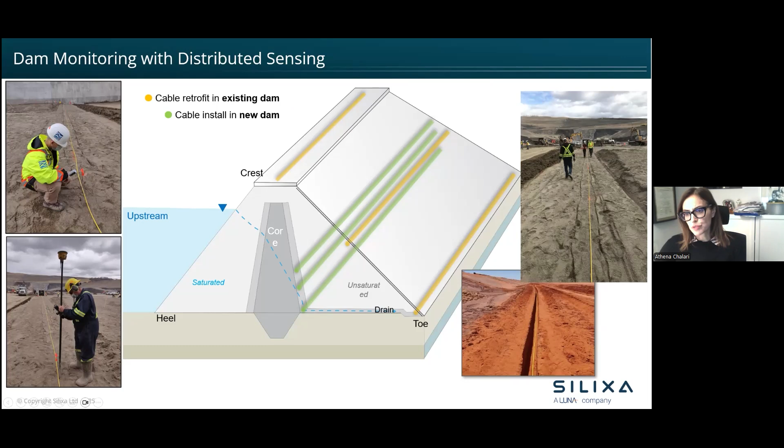The main cables that we will be using for dam applications are tactical ones. These are tight buffered cables that are very easy to deploy. They don't have any memory and can be trenched. So the very typical one will be this one with a double jacket to make it even more robust, and a rodent deterrent to avoid any chewing from animals. And if there is an existing dam, for example, and we want to put it into standpipes downstream, we can also use a steel armor cable.

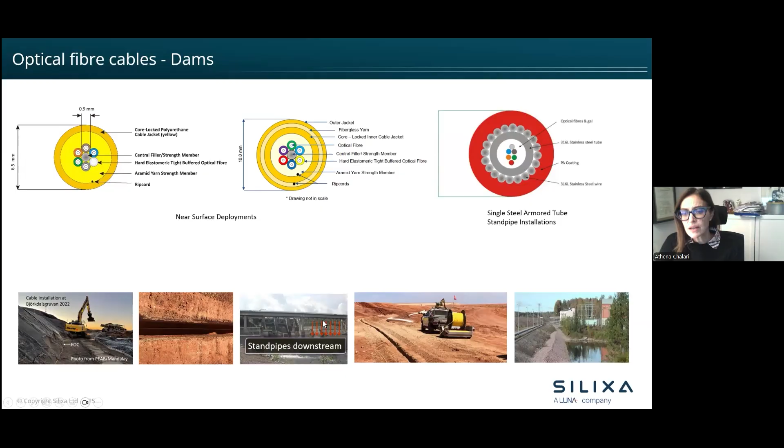The main concern in dams is internal erosion, and internal erosion occurs when the water that seeps through the dam carries soil particles away from the embankment or the tailings, leaving voids in the structure. So without any intervention, this erosion may finally lead to failure of the dam. Consequently, early detection of any internal erosion effects is of key importance to reduce risk and ensure the safety of the dams. And we can measure the dam with many parameters. We can do dam breach detection through continuous monitoring of strain, of seismic activity, of any movement, of deformation or subsidence. And all this can be detected at the early stages.

With the DTS, the distributed temperature sensor, we can detect seepage flow and calculate the seepage rates. With the iDSS, measuring the static strain, we can detect the earth movements along the dam and identify the strain loads on the cable. With the DAS, the distributed acoustic sensor, and advanced imaging techniques, we can identify nonconformities and regions of concern within the structure, saturated regions, identify voids and material changes. And by having an edge computing platform, we can integrate all these parameters and provide dense data sets that we can send to a cloud to the operator or process on site.

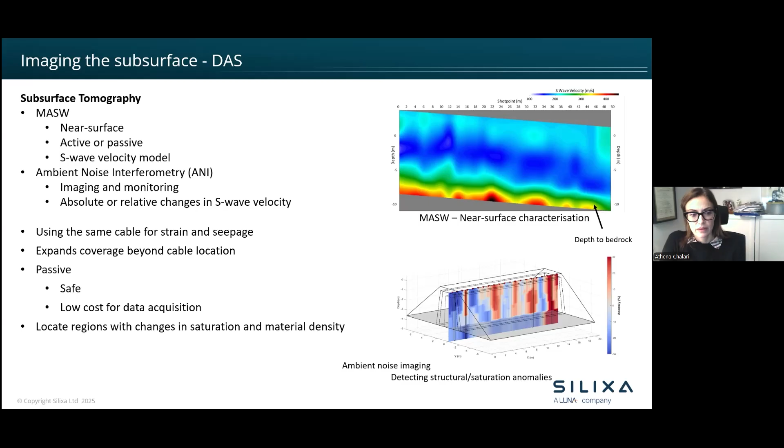Now, with the system architecture, the interrogator can be on site, with the fiber optic cable installed as you saw in the previous slide, the interrogator in a cabin or a control room on site where you have either only the interrogators with a network switch, sending the data via a cloud to the operator control system, to their SCADA, to run the application at their premises.

Or we can have on-site processing servers where we are doing the processing and the application is running on-site, and we are simply sending the processed data together with the raw data.

So how the DTS will work, this is based on our XSeepT application. We need a system calibration. The system calibration will happen with a reference measurement of several months to monitor the environmental temperature. Then the modeling will be based on the material properties of the dam and the seasonal temperature variation to set

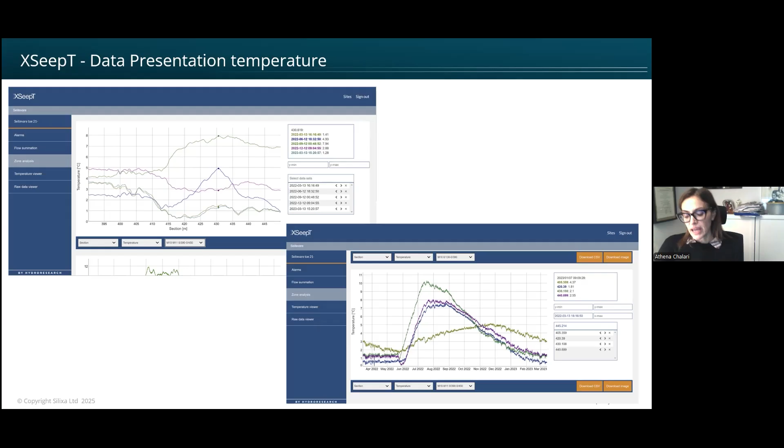different thresholds. And after setting the thresholds, we convert seepage into volumetric flow, liters per second, and identify how much fluid escapes from the dam. So we see a significant increase in speed and increase in flow rates that potentially highlight issues.

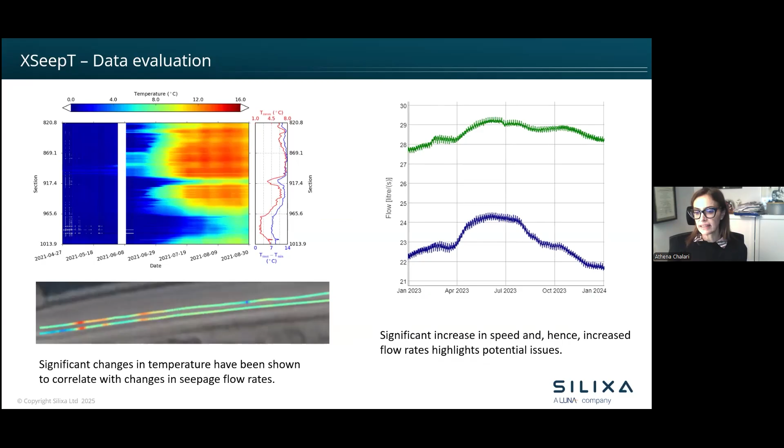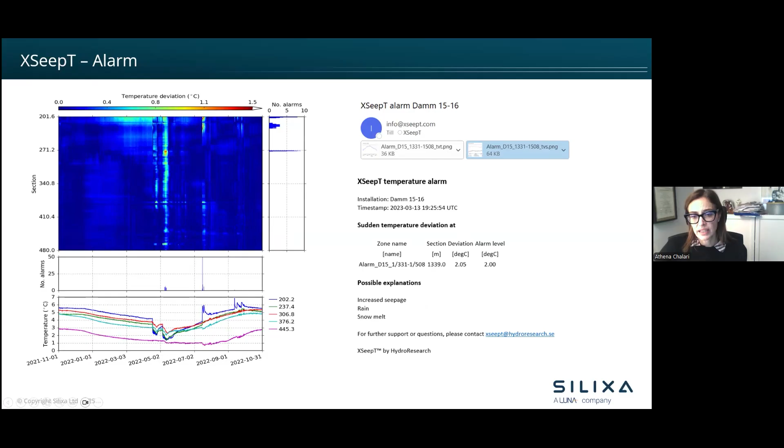But when we are monitoring the dam the whole year, and after modeling, we are able to distinguish the reason for the event. Obviously, it's not very easy to present a case study from tailings. These are most of the time confidential information, but here we are presenting a case study on an embankment dam, which is a similar deployment.

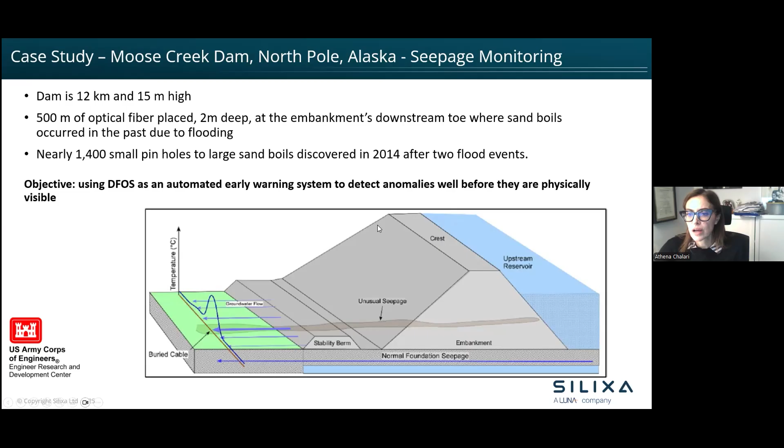This is Moose Creek Dam in Alaska, where we have deployed 500 meters of optical cable at 2-meter depth into a trench at an area where in the past they had reported pinholes to large sand boils after some flood events. And the objective was using the distributed fiber optic sensors as an automated and early warning system to detect anomalies well before they're physically visible.

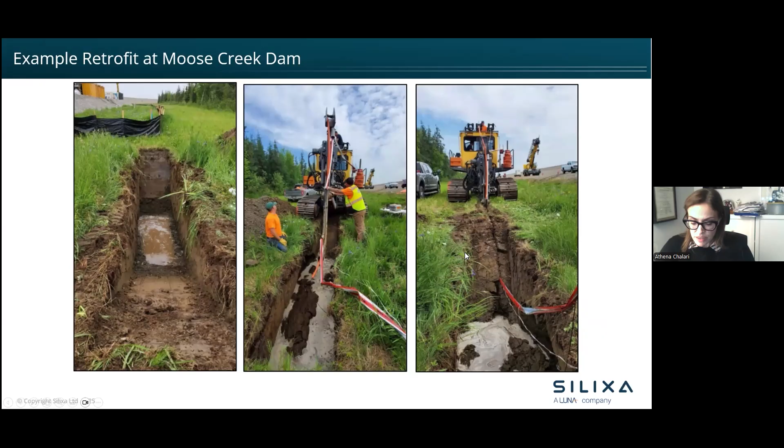And sorry, this was also in a study, and this is a published study that you can find online, in collaboration with the US Army Corps of Engineers and Silixa.

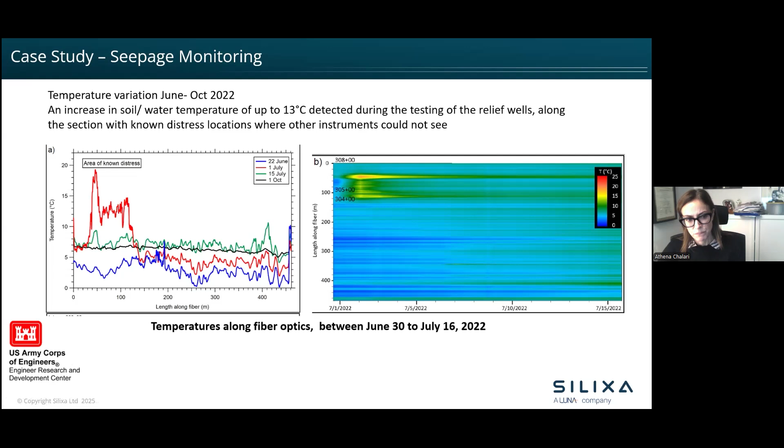Now, going to geothermal monitoring, Silixa has been involved in different types of geothermal systems, from ground source heat pumps, which are shallow geothermal systems, open loop or closed loop, to mine water energy, so how we can extract heat from abandoned coal mines that are filled with water, and shallow aquifers, to deeper hydrothermal systems that have temperatures up to 260 degrees, and enhanced geothermal systems like FORGE, again at quite high temperatures and in granite.

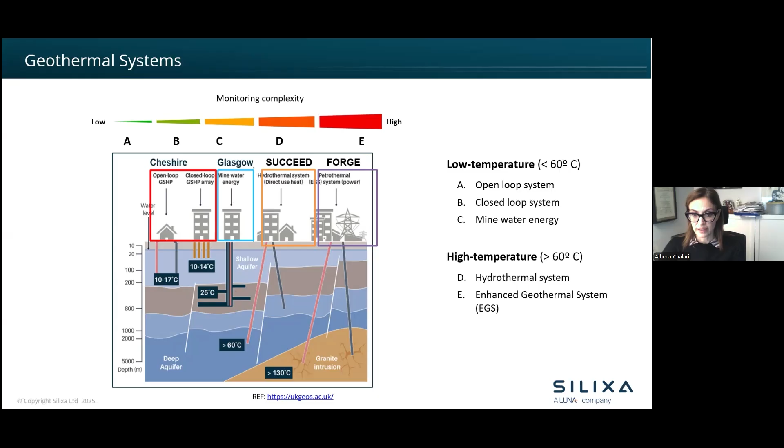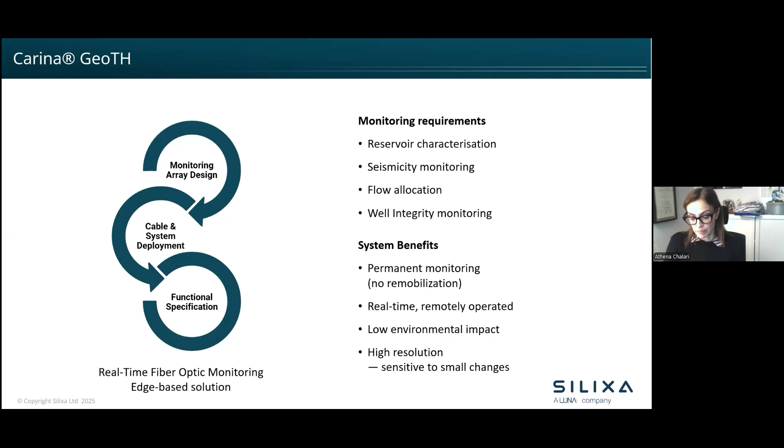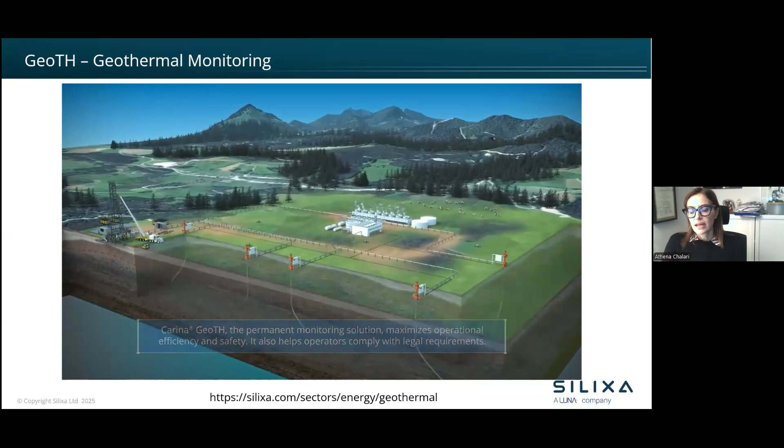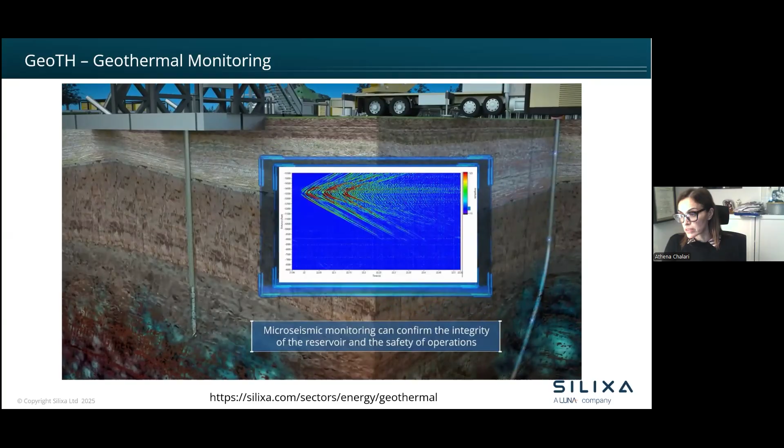We will ideally want a permanent installation for a geothermal system. The permanent installation will allow time-lapse, but will also allow microseismic event detection and localization, to monitor the induced seismicity. We can deploy fibers in production or injection wells, and we can also deploy fibers in monitoring wells. And these wells can be daisy-chained.

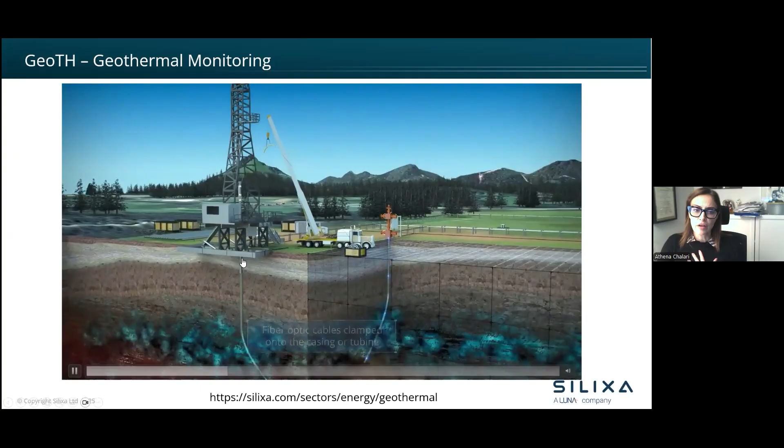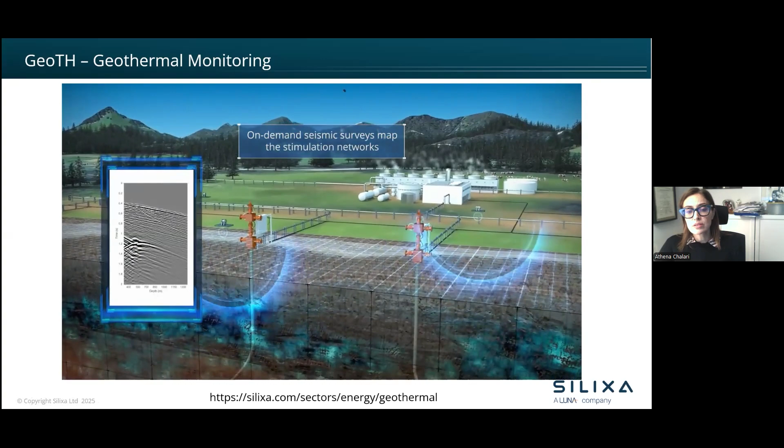So when we have a permanent deployment, you see here the casing, the cable will be clamped outside the casing, then we lower down the casing and we cement, and the cable will be well coupled with the formation and provide good quality data. We can have on-demand seismic surveys, so vertical seismic profiles and imaging of the subsurface.

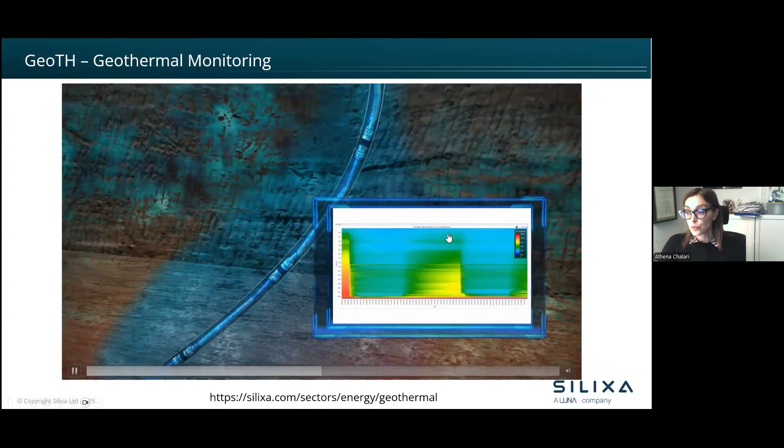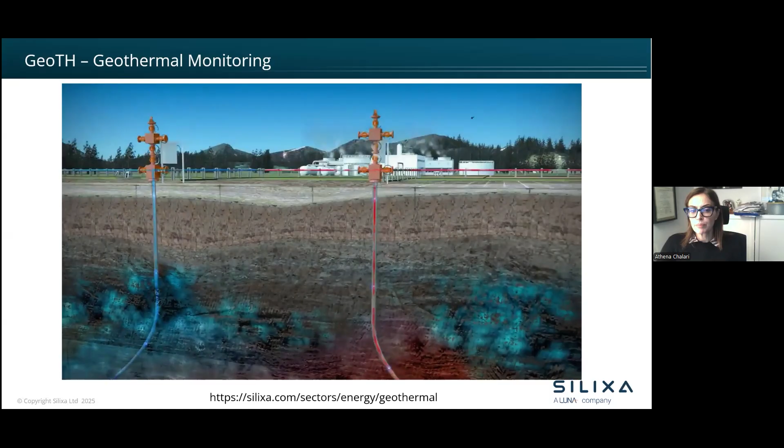We can measure with DAS and simultaneously with the DTS. So the DTS can also be used at early stages to monitor the cement curing process. We can see interconnectivity between the wells and measure flow allocation, temperature distribution monitoring to enable dynamic reservoir injectivity.

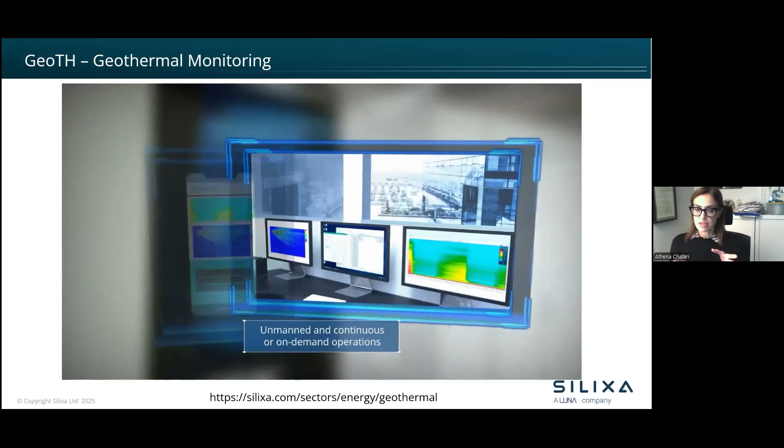And then we are bringing the signal from downhole with the surface cable to our control room. And inside the control room, we can have on-site the different interrogators to measure the 3 parameters: temperature, strain, and acoustic. We can have data storage on-site, but also enable remote access for quality control, or have data processing servers on site based on our platform to do all the applications there, and then send the data to the operators using a cloud system.

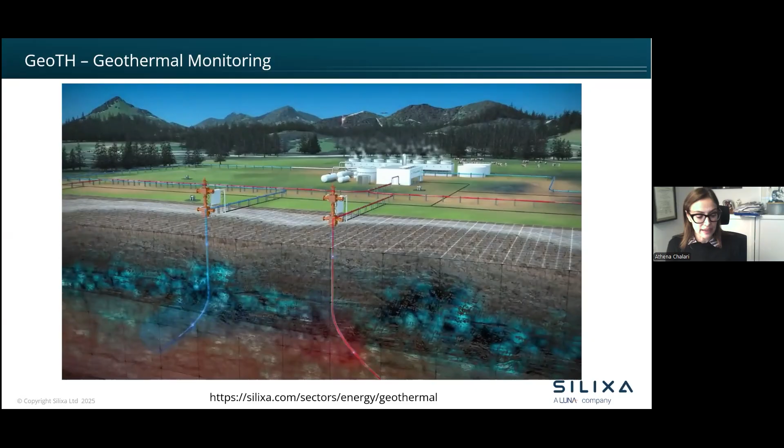The cables then can be deployed in many ways. Ideally, for a permanent installation, we would like behind the casing cemented, well coupled with the formation to enable also time-lapse surveys. But we can go on tubing, production or injection tubing. This is a semi-permanent installation for brownfield development, or wireline slickline installation like we do in oil and gas for an intervention where you will require surface service.

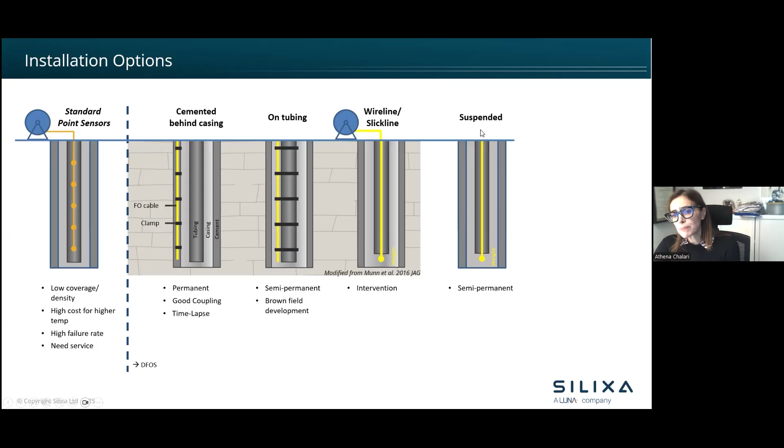Or if we have existing wells, and these are all typically observation wells, the only way to monitor the geothermal plant, the geothermal field, is to have a suspended system, and this is a semi-permanent installation.

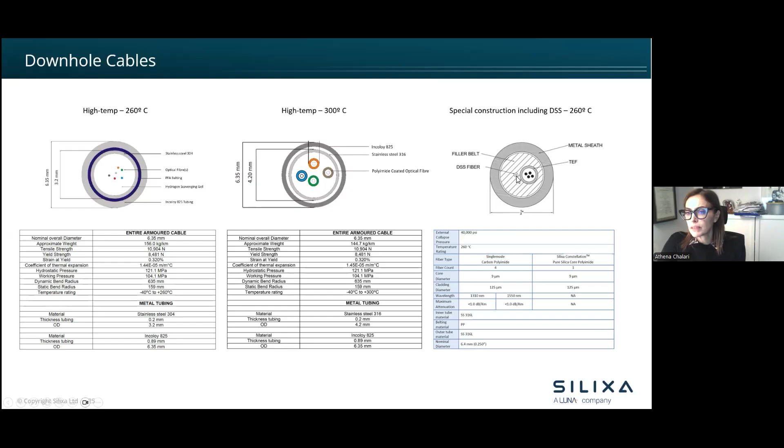For the downhole, typically behind the casing, on deep geothermal that reaches high temperatures, we can use double steel tube cables up to 260 degrees Celsius. This cable has an internal tube, the fibers are in a loose tube, then you have a belt to avoid any slip between the outer tube and the inner tube. You can go to 300 degrees with polyimide coated optical fibers, or you can go to cable designs where you will have the DAS and DTS measurements in a loose tube and a tight buffer fiber for the static strain outside.

The architecture of the system is having one line of cable going down into the well, and inside the cable you will have 4 to 6 fibers. The multi-mode fibers will loop together, the single mode will be looped together, and create loops inside the same cable. These splices at the bottom of the cable will be protected with a downhole assembly. So the optical signal will go down and up, and then in a junction box, it will be spliced with a surface cable, trench, and meet the next well.

So that way we can have clusters of wells connected together and measure simultaneously with a single optical path, and we can bring with a surface cable the optical signal back to the control room where we have all the interrogators and the servers, and we can do our data storage, processing, and acquisition.

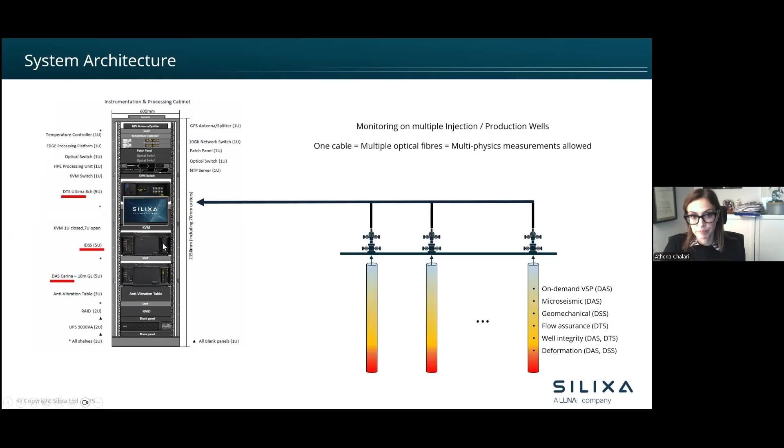If we have the edge platform system, we can have an edge scheduler that will tell the systems how much time they will interrogate each cluster of wells or each well, and with what configuration parameters, and then jump to the next cluster and repeat the cycle. We can have single distributed plots or multi-physics plots, and integrate that with point sensors into the wells. So the system is a completely scalable architecture. It's a modular system that can be quite simple or have all the applications there.

And the main applications are these. You can have vertical seismic profiles, so you can have your frequency spectrum, see the raw data, see the stack data, see how the signal to noise ratio improves with the stack data, make any corrections and do the quality control, convert to SEG-Y files, have thermal profiling plots with the DTS, temperature to distance, temperature to time, and multi-mode plots with DAS and DTS together, continuous acoustic data, and casing integrity by combining also data from data loggers.

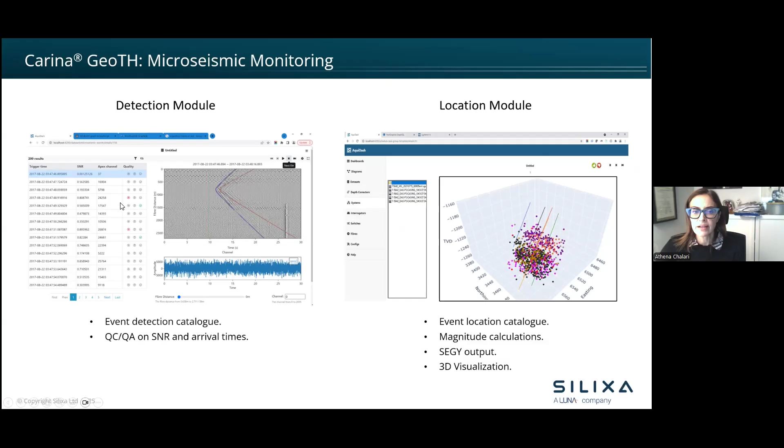Another module is the module for induced seismicity, microseismic event detection. And if we have cables installed in more than one well, we can also localize the event based on event location catalog, magnitude calculation, SEG-Y output, and a 3D visualization of the microseismic event cloud. From the apex of the event, P and S waves, you can see how far the event is from the fiber optic cable.

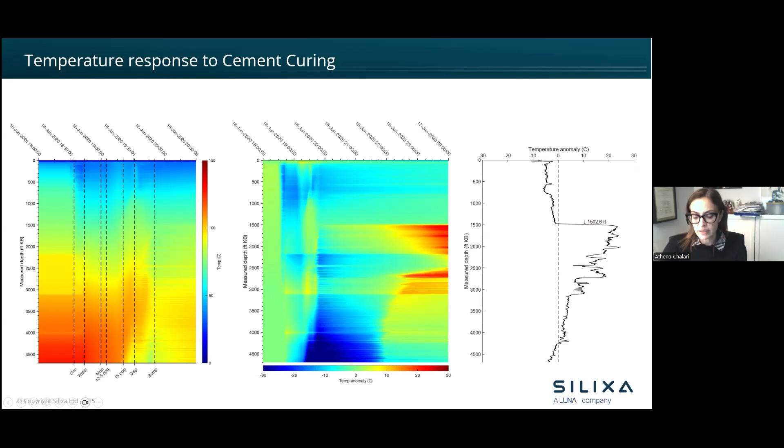As I said, during the cementation process, we can monitor the cement curing with the DTS. The cementation is an exothermal reaction, so you see here how the temperature jumps when the cement starts curing, and the thermal blocks. And we can combine if we have a well that is stimulated in different zones.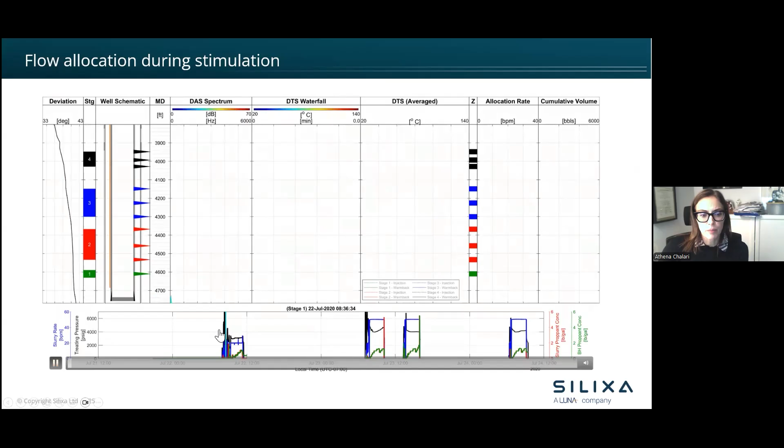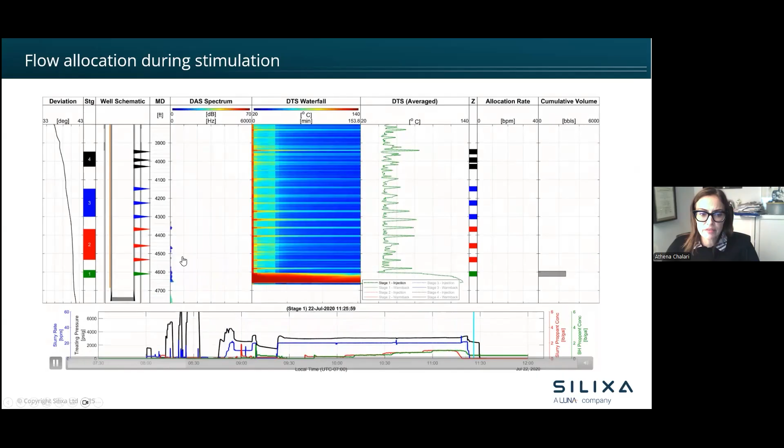So what we are doing now, we are combining information from pressure. We see in the deeper zone how the fractures are opening during stimulation. And when we jump to the zone above, we'll see that this is not active anymore, and fractures above start activating. And that way we can also do fracture rock characterization and see if any fractures are connected, go to zone 3, and so on.

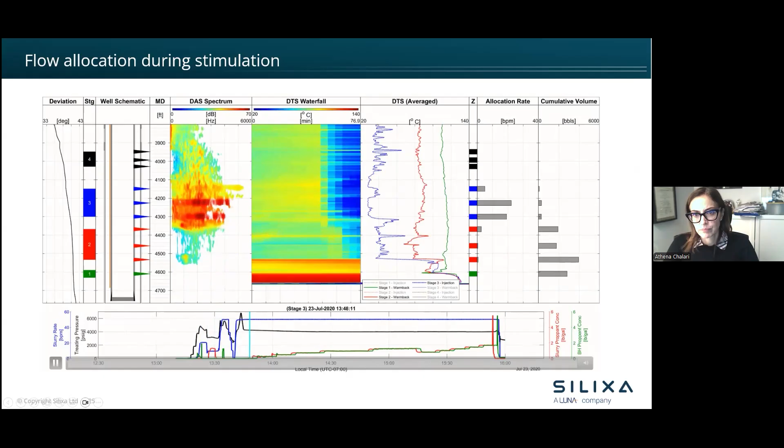Going into some geothermal case studies. I don't know how good I am with time.

This is the Utah FORGE site. FORGE is Frontier Observatory for Research in Geothermal Energy. So practically we are testing different technologies to find the optimum cost-effective technique for geothermal monitoring on an enhanced geothermal system. This is sponsored by the US Department of Energy and comprises 3 wells. This is a seismic monitoring well that was the first one that was drilled, and then the production well and the injection well.

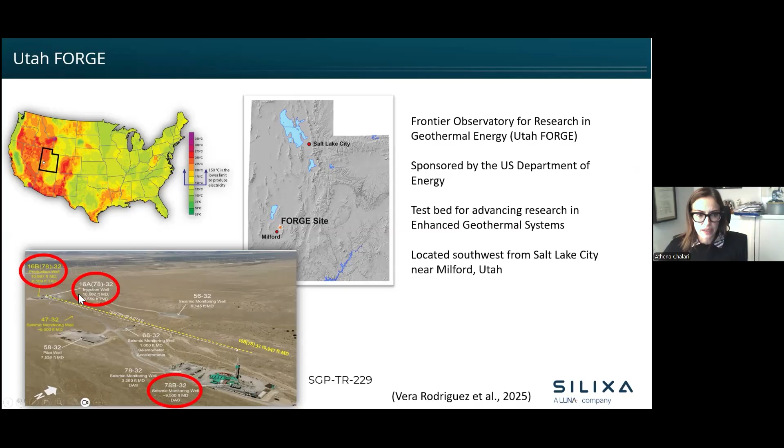So we have fibers in the observation well and in the production well. In the observation well, we have single mode fibers. In the production well, I think there was an issue with the single mode fiber, so we are operating the DAS system on a multi-mode fiber. And you see here also the injection well parallel to the production.

And in the control room, we have an Ultima DTS unit. We have our iDSS system to measure any deformations. We have our iDAS system for the acoustics, our edge control. The iDAS is sitting on an anti-vibration table to absorb any vibrations and provide better results. And we have also a data storage RAID. Here for these downhole techniques, we will be mainly using 10-meter gauge length. That is also comparable to a geophone array.

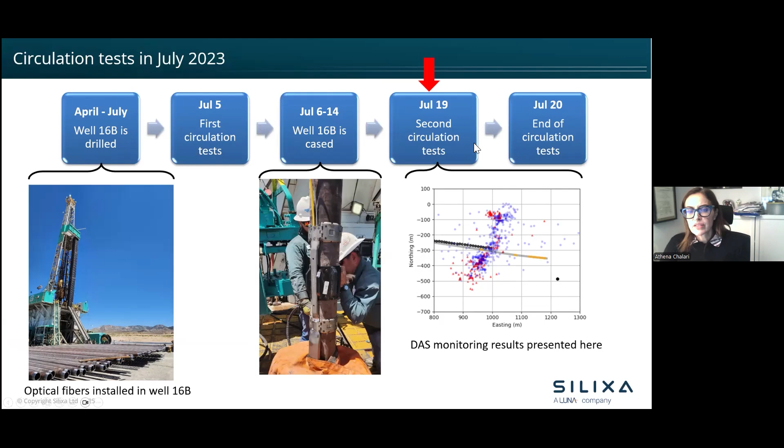They started with a circulation test. They drilled the production well in April 2023, and then they did the first circulation test. Here you see the casing, the cross-coupling clamp, and the cable clamped here onto the casing. This is a cable, and a centralizer to protect the cable as the casing is going downhole. Then we have the second circulation test and some results.

We were able to identify 257 microseismic events. And the 3D modeling that was generated from the DAS data was in good agreement with the surface station locations that you see here in blue. The DAS is in red, from Niemz et al. in 2024.

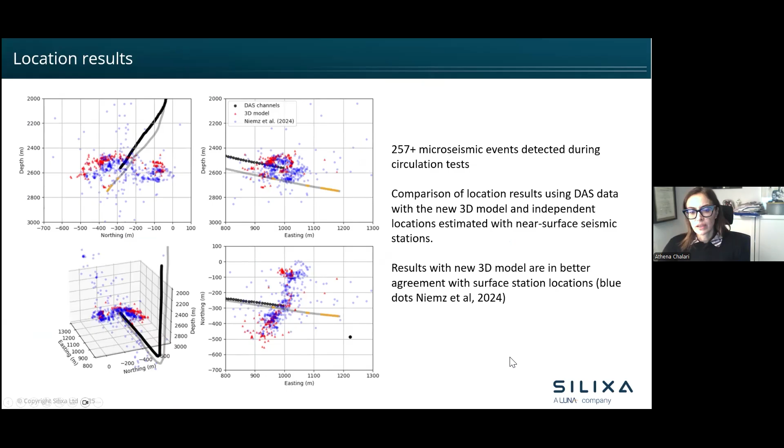Another installation is shallower geothermal. This is at the UK Geoenergy Observatory in Glasgow, in Scotland. BGS, the British Geological Survey, is the operator of this site and the owner. And there are abandoned coal mines that are filled with water. And the aim is to have geothermal energy from mine workings at scale and provide to academia and industry a living lab, a research facility where they can go and do testing of different technologies. Silixa was responsible for providing the interrogators and cable deployments.

So what we have here is a bit different cables. Because we had ERT at the well, everything was plastic. The casing was plastic, the centralizer is plastic, and you see here plastic cable ties to secure the cable outside the casing and then grout. The cable was a hybrid cable that includes two copper components that can be connected together and create a closed circuit. Then we are using a heat pulse system together with the DTS to induce power into the cable. We are heating the cable and we're measuring the heating and the cooling phase of the cable. That way we can measure the apparent thermal conductivity.

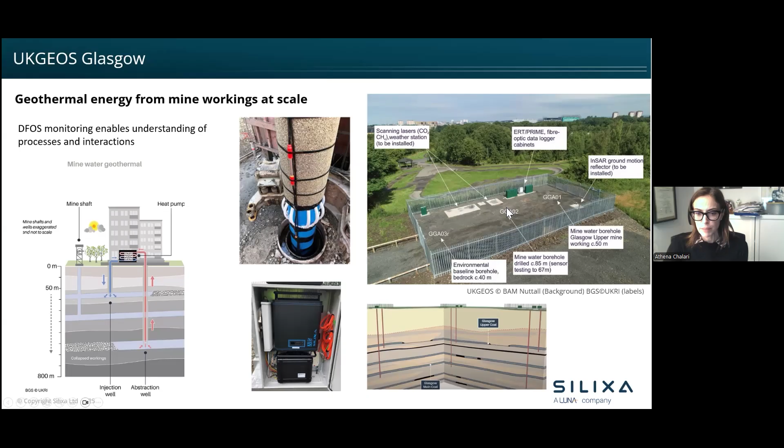And we can also bring a DAS and measure. I think University of Bristol has done some active seismic surveys with a small seismic source, and this work is published, plus some work on the DTS using the abstraction reinjection and the response.

The architecture of this site was that we are creating 4 clusters, and each cluster includes 5 wells, each well of a different type. These wells were connected with surface cable to form the cluster. The multimode fibers were connected with the DTS system that has 8 channels, that was controlled by the heat pulse unit and the relay, where we connected the copper elements inside the hybrid cable.

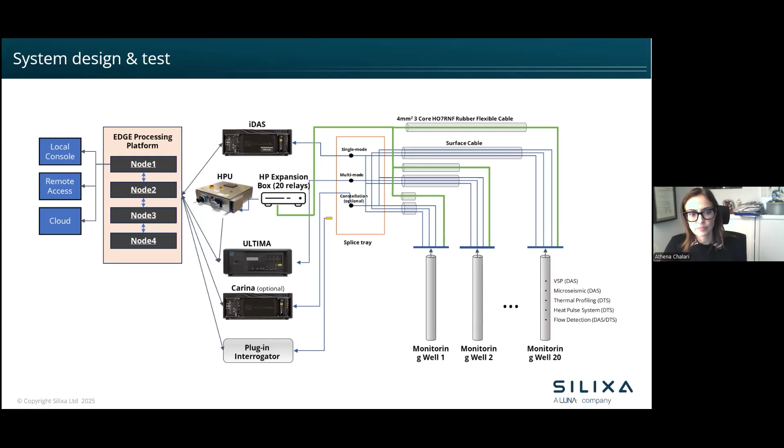And I will close this presentation with a case study from the SUCCEED project. SUCCEED is an ACT-funded project, it has now finished, with 2 different sites, one in Kizildere and one in Iceland at Hellisheiði. This is a CCUS project, so the aim is to reduce CO2 emission by storing CO2 while enhancing the geothermal performance. So maintain the reservoir pressure, increase the reservoir permeability, and understand what is happening when we re-inject the CO2

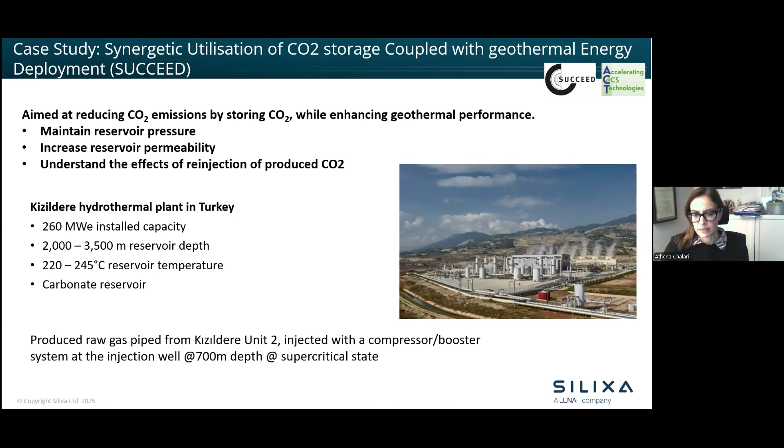into a geothermal field. Now, the site of the Kizildere hydrothermal plant in Turkey, the reservoir is 2 to 3.5 kilometer depth, and the temperature is approximately up to 245 degrees Celsius. The idea was that the produced raw gas piped from the geothermal plant was injected directly into the wells with a compressor or a booster system at 700-meter depth at the supercritical state.

So what we have here, we have 2 existing observation wells, where we used this suspended system. So this is a double steel tube fiber optic cable that we clamped together with a wire. See here the cable that is deployed simultaneously with this steel wire, and they were clamped together to hold the cable weight, and with this wellhead adapter remained in the well for several months at these very high temperatures, at 260 degrees.

Here is a junction box where we connected the downhole cable with the surface cable that goes to the next well, and we also have this T-shaped installation on the surface to be able to do some surface seismic. We used the helically wound cable connected with the tactical cable on the surface.

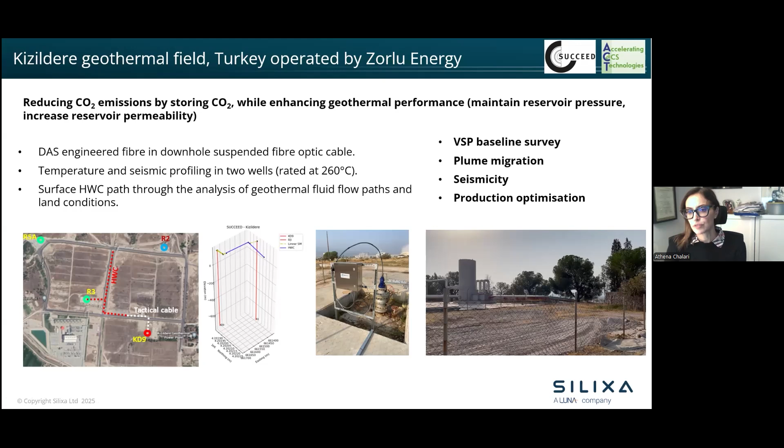What we managed to do is a VSP baseline survey, and in the future, when the CO2 is injected, for plume migration, seismicity, and production optimization. And these are some preliminary results from the baseline survey to enable also time-lapse monitoring of the injection process.